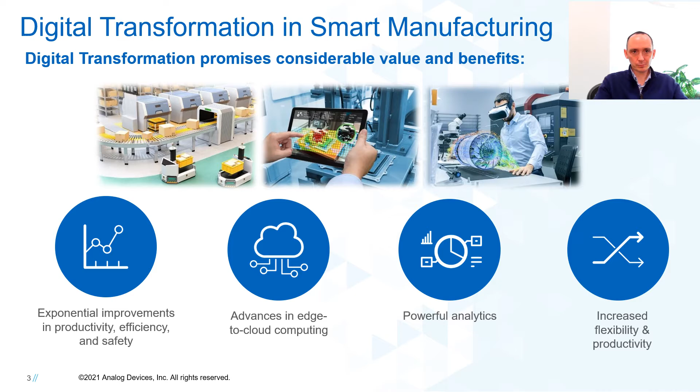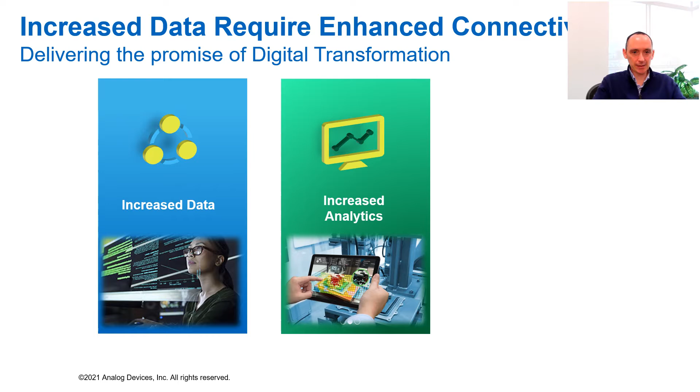At the heart of digital transformation is data. As we increase the amount of data that's being generated, we have to deploy enhanced connectivity solutions if we are to deliver the promise of digital transformation. So smart manufacturing fueled by digital transformation is really centered on generating more data and using advanced analytics to create insights from this data, with a view to increasing productivity, flexibility, and ultimately more sustainable smart manufacturing.

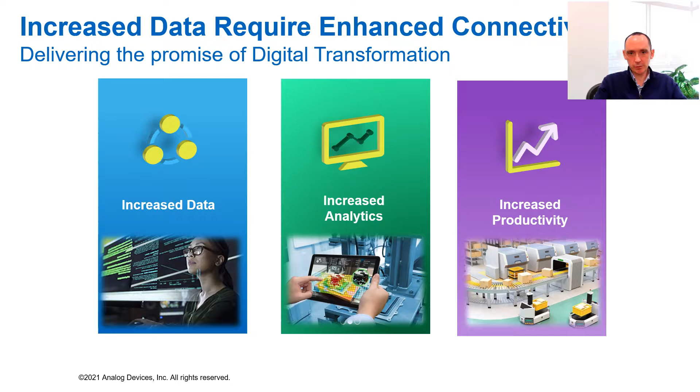One of the key challenges around connectivity is how do we bridge the IT, the information technology network, and the OT, the operational technology network. If we are to make the data that resides at the edge of our networks, in terms of connectivity to sensors, actuators, motion applications including robotics, we need to make the data within these end assets more accessible. We need to get this data to the cloud, whereby we can deploy advanced analytics to create the insights that ultimately will drive the increased productivity of our smart manufacturing.

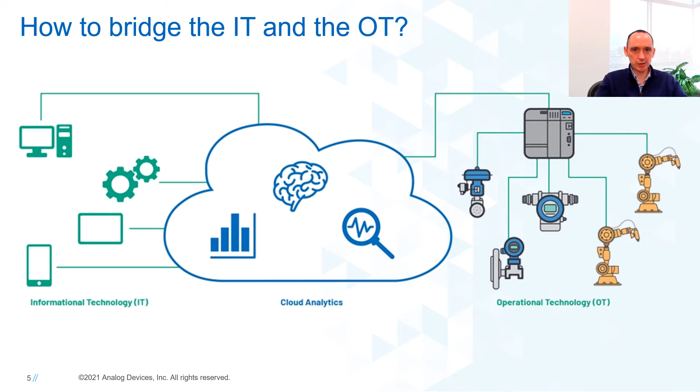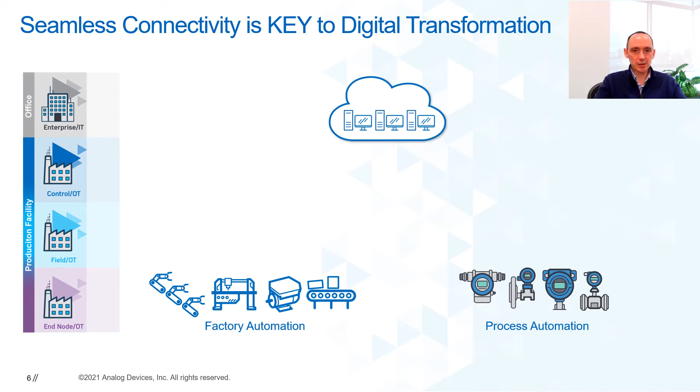So we have to bridge the IT and the OT. Seamless connectivity is the key. Again, to unlock the promise of digital transformation, we need to enable our applications across factory automation and process automation to be able to share data from the end node through to the field, up to the control level, and ultimately into the enterprise. We have to bridge the IT and the OT, and we will do that with seamless industrial Ethernet connectivity.

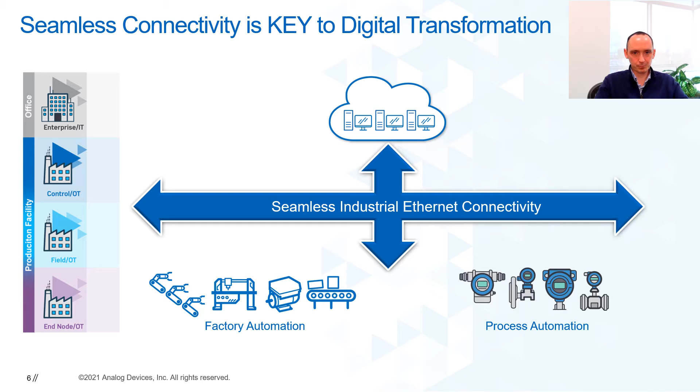Intelligent motion control is the core building block of smart manufacturing. Digital transformation in smart manufacturing can drive productivity improvements, enable more flexibility and scalability in terms of the manufacturing footprint, and finally can deliver more sustainable smart manufacturing.

Motion control has evolved over time. Grid-connected motors are the most basic and simple motors used in smart manufacturing today. They run at a relatively fixed speed, independent of any load variation. Therefore, they are a relatively inefficient solution.

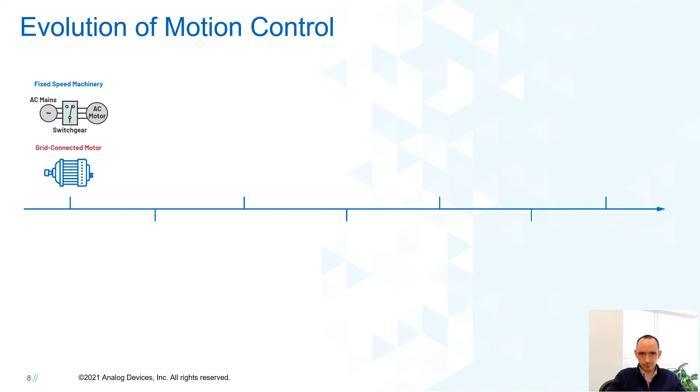In order to drive higher levels of efficiency in smart manufacturing, we see an accelerated transition towards inverter-driven motors, where the addition of an inverter stage now allows the motor to run at a variable speed, and the speed of the motor can now be matched to the load requirement, which enables significant energy savings.

To enable higher levels of automation in terms of performance and complexity, a variable speed drive adds both current and position feedback to the inverter-driven motor to provide more control in terms of position, velocity, and torque.

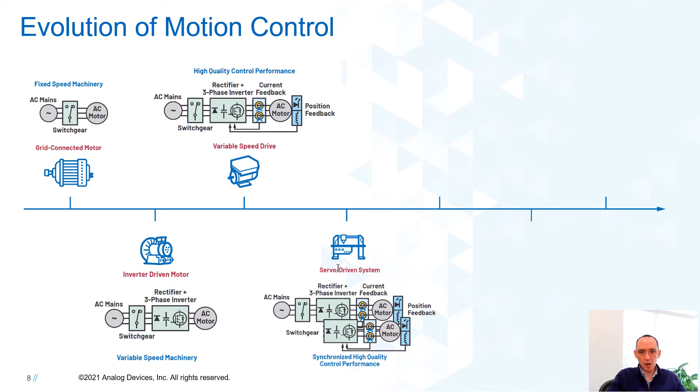Building on the variable speed drive is a servo-driven system that has multiple axes that are synchronized to provide high quality motion control, for example in machine tools and CNCs.

Building on top of the servo-driven system is mechanical integration and machine control used to deploy industrial robot solutions. Collaborative robots build on top of industrial robots by adding safety sensing, such that an operator can safely work in close proximity to the collaborative robot. And then finally, mobile robots build on collaborative robots by adding localization sensing and collision avoidance.

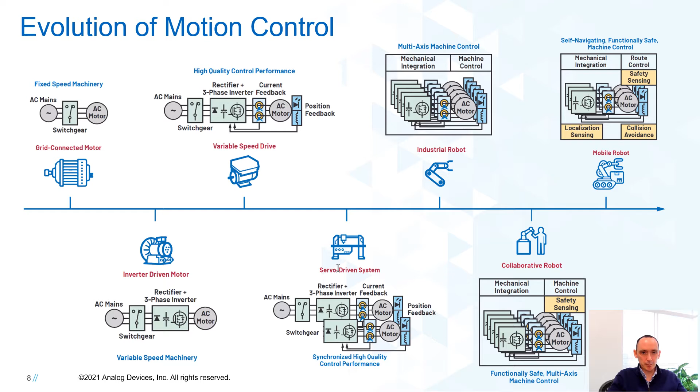So here with this slide, we see how intelligent motion control has evolved over time to deliver higher levels of productivity, efficiency, and ultimately autonomy in smart manufacturing.

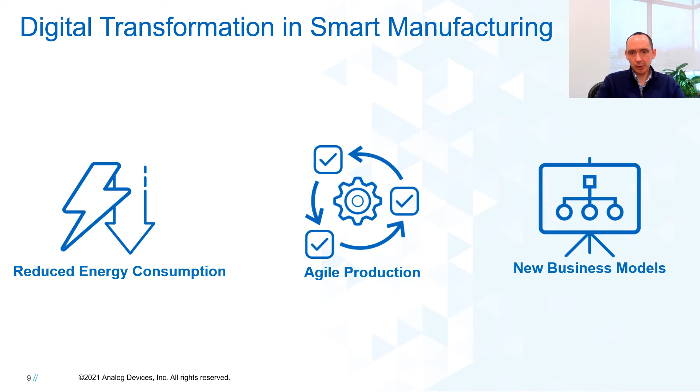Digital transformation in smart manufacturing is really being accelerated by three key growth drivers. First, is a desire to reduce energy consumption in smart manufacturing. Secondly, is a requirement for more agile production that can quickly change based on customer demand and end market dynamics. And finally, a move towards new business models around service-based activities. So we will look at each of these three key growth drivers in a little bit more detail in the next few slides.

Let's first of all look at sustainability and our goal of reduced energy consumption. One of the key enablers of reducing energy consumption in smart manufacturing is accelerating the transition from fixed speed motors to variable speed motors. Given that almost 70% of electricity consumed by industry is used by electric motor systems, there is a huge opportunity here in terms of variable speed drives.

Regulations are actually playing a really important part of this transition, and recent EU regulations that came into effect in July of this year, 2021, have further strengthened and are accelerating that transition towards higher efficiency motors, higher efficiency drive solutions, and also higher efficiency motor with integrated drive solutions.

So for example, in the case of a motor, we have 5 different classes of efficiency ratings, with a goal to try and move from the IE1 towards the higher levels of IE2, IE3, 4, and ultimately to IE5. And equally, we have similar efficiency standards for both the drive and the motor plus drive.

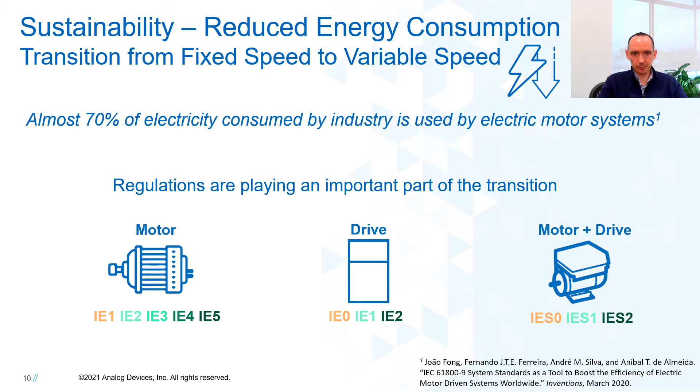If we are to deliver agile production, which gives us more flexibility and productivity, connectivity will be a key part of delivering this going forward. So I'm going to look at 3 areas briefly: industrial Ethernet, the potential for 5G within smart manufacturing, and finally we will briefly look at IO-Link.

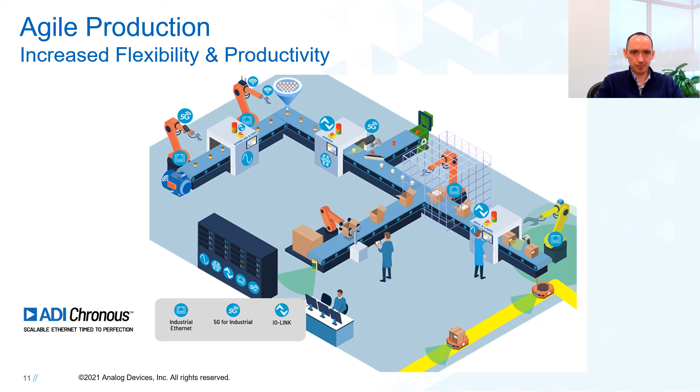So let's kick off with IO-Link. As we look to make our smart manufacturing installations more intelligent, we need to be able to support more intelligent sensors and actuators. IO-Link is a digital point-to-point communication that enables edge devices like sensors, RFID readers, valves, motor starters, and I/O modules to be installed and configured quickly.

IO-Link supports self-diagnostics in terms of the health of the asset, and ultimately enables new devices to be installed and replaced very quickly and easily, again with a view to delivering more flexible and scalable manufacturing.

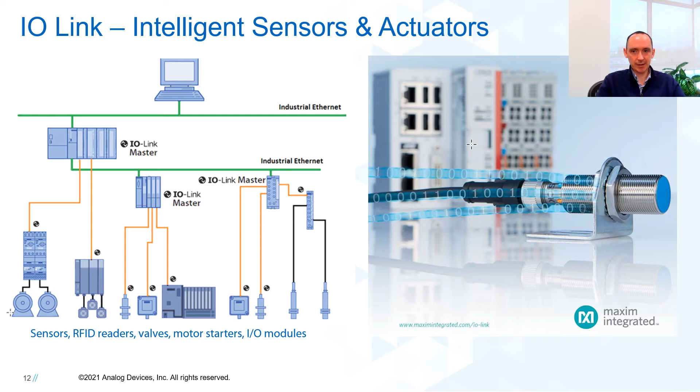Industrial Ethernet enabling deterministic motion solutions in smart manufacturing. Today's smart manufacturing utilizes 100 megabit industrial Ethernet connectivity combined with layer 2 industrial Ethernet protocols like EtherCAT, Profinet, Profinet IRT, Ethernet IP, as examples.

Real-time deterministic industrial Ethernet is used to control complex motion, for example with industrial robotics or in conveyor pulley systems.

But we see a transition towards gigabit connectivity as we increase the complexity of the automation and look to deploy, alongside the deterministic motion solutions, increased amounts of vision systems that monitor for quality and ensure safety. We see a requirement for more data bandwidth to be supported in our next generation of smart manufacturing capabilities.

So we see the deployment of gigabit TSN, which supports both cyclic communication for motion control and acyclic, or non-time critical, communication in terms of vision systems and health monitoring of assets.

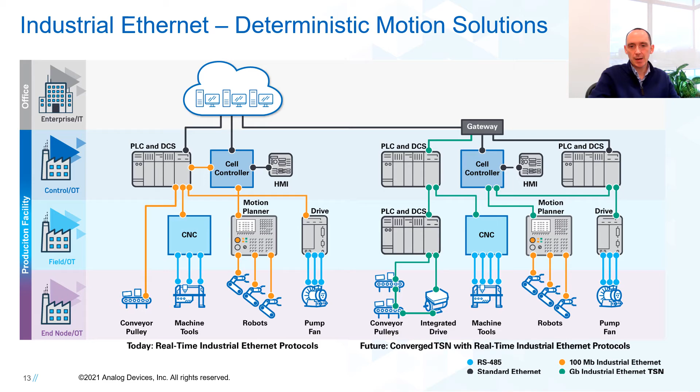Finally, in terms of connectivity and smart manufacturing, let's discuss the potential of 5G in next generation smart manufacturing. Traditionally, wireless connectivity was used for more of the monitoring communications in smart manufacturing, and wired connectivity dominated in terms of control. That was because traditionally a lot of the wireless capabilities were unable to deliver the levels of latency, determinism, and reliability to be used in control applications.

However, 5G has the potential to make a positive disruption in terms of smart manufacturing connectivity. This is driven by 5G's capability to support ultra high reliability and ultra low latency, which now opens up 5G as a potential for communication to be used, for example, with mobile robots and industrial robots in smart manufacturing.

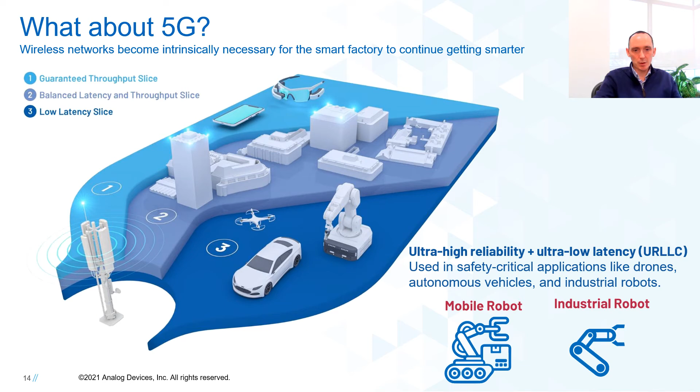Finally, in terms of new growth drivers, new business model opportunities are being created around condition monitoring. So typical asset examples within a smart manufacturing environment include automation equipment, pumps, and conveyors.

One of the key goals of digital transformation is to reduce unplanned downtime, followed by extending machinery lifetime. If we can extend the usable lifetime of an asset, then we can have an important sustainability impact by reducing the amount of raw materials and energy needed to build replacement assets.

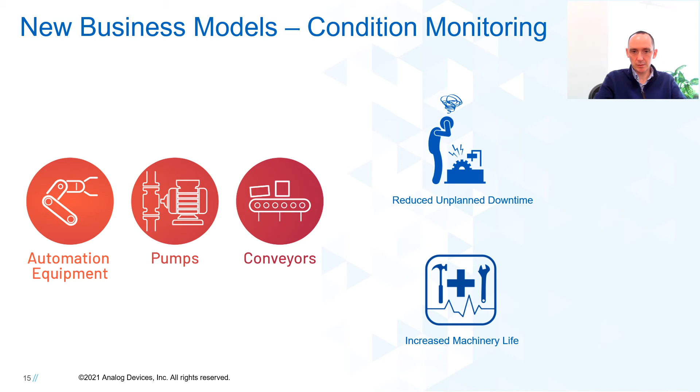Condition monitoring can drive higher levels of uptime and productivity. And then finally, there is the opportunity for increased billable hours for service-based contracts.

Let's take a moment to look at two examples of service-based contracts that are being enabled via condition monitoring and digital transformation. The first one revolves around pumps. Today, a pump OEM sells a pump and installs a pump. They have an ambition to create new revenue-based streams based on providing services.

Rather than just selling a pump, they want to charge their users based on the volume of liquid pumped, be it water or fuel, thereby creating new service-based revenue streams. A second example is around conveyor systems.

System integrators today are installing and maintaining very complex conveyor systems, for example, in parcel sorting warehouse applications. Their ambition is to provide more than just that installation service. They want to charge based on the number of parcels sorted, and based on providing a service and delivering a certain level of uptime.

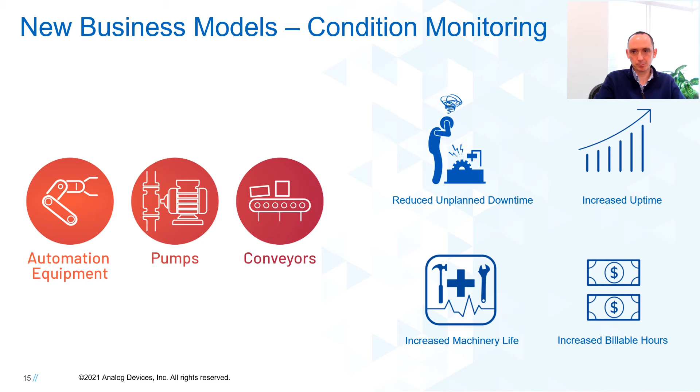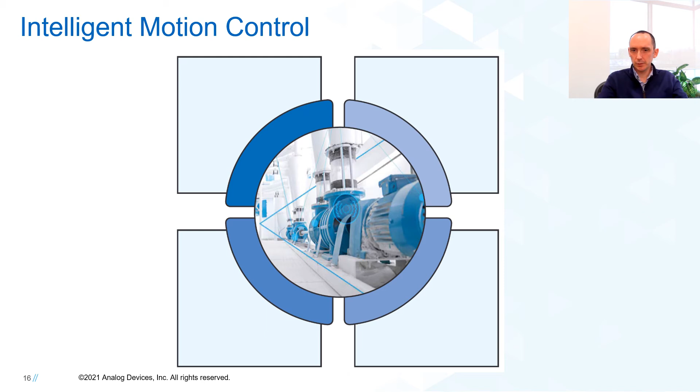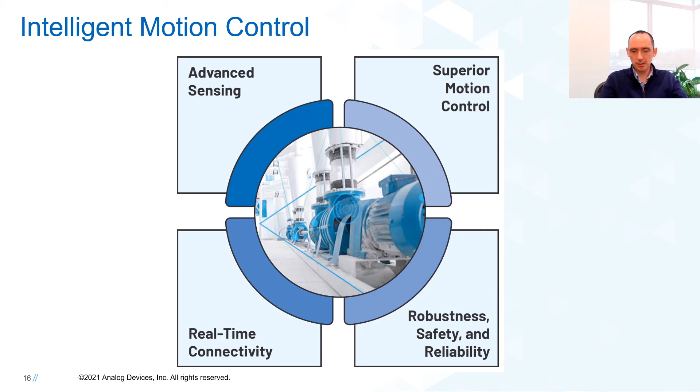Intelligent motion control plays a key part in enabling digital transformation in smart manufacturing. Its requirements include superior motion control, robustness, safety and reliability, real-time connectivity, combined with advanced sensing. Delivering on these four requirements enables next-generation smart manufacturing that is more productive, more flexible and scalable, and more sustainable.

In order to meet the requirements just outlined, there are six key technologies that need to be deployed to meet the requirements for intelligent motion control.

First is precision measurement. Intelligent motion control requires precision current, voltage, and position sensing, with a view to delivering higher levels of quality and more optimized manufacturing, reducing manufacturing time and steps within the flow. We need isolation and interface technology to ensure robust, reliable operation and a safe environment in which operators interact with these assets, providing safety isolation around the various assets within smart manufacturing. We also need robust and reliable power management solutions.

We need higher density power management solutions so we can have smaller form factor assets that can be decentralized and moved closer to the manufacturing asset itself. For example, to enable higher levels of flexibility and scalability in intelligent motion control applications, we see a transition from centralized drive racks to more decentralized drives placed closer to the load, and in some cases the drive is integrated with the motor.

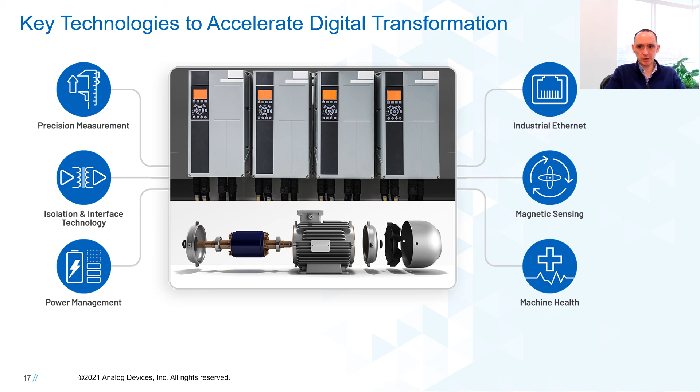The combination of Maxim Integrated, now part of Analog Devices, and Trinamic, now part of Analog Devices, enables ADI to provide a broader base of technologies for intelligent motion control applications, helping our customers and partners accelerate their digital transformation journey.

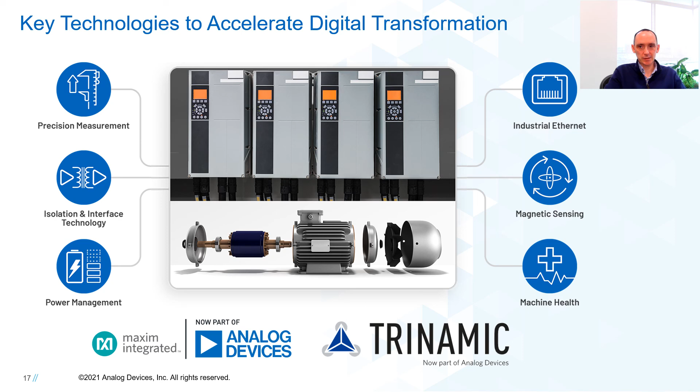In summary, digital transformation in smart manufacturing enabled by intelligent motion control solutions will have two key benefits. First is reduced energy consumption: intelligent motion control applications built with variable speed drives will significantly reduce energy consumption in smart manufacturing.

Secondly, agile production enabled by intelligent motion control will provide smart manufacturing that can quickly react to changing consumer demand. As we see post-COVID lockdown increases in consumer demand, the need to future-proof smart manufacturing has never been clearer. Intelligent motion control, leveraging digital transformation, can provide next-generation smart manufacturing that quickly reacts to changes in market demand and consumer buying behavior.